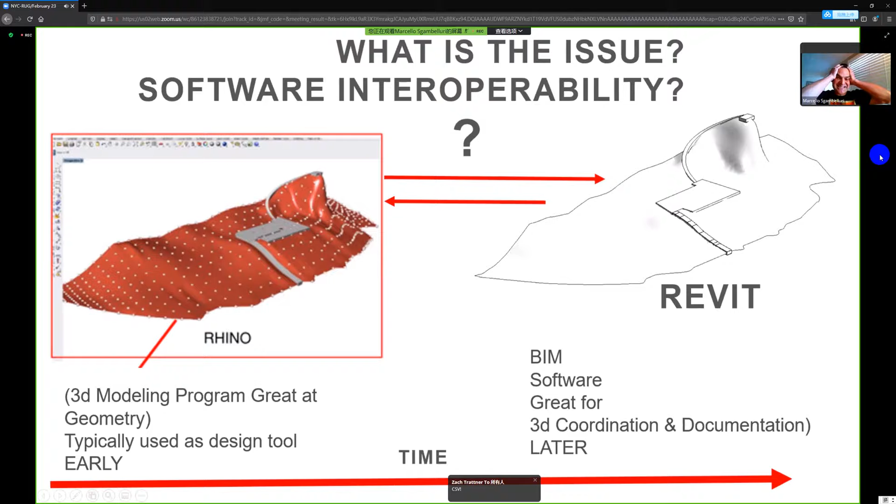Okay Jeremy, very good, migraine, nearly everyone has an issue with it. Okay Bob, very good, Bob's talking for the whole group, awesome. So it's 2021, why is this still a problem, right? I'm just laying the groundwork, we're going somewhere with this, okay everybody?

So what have we had to do in the past? It's sad, it really is, but this is what happens. We have to sometimes remodel from scratch, right? Because we can't just go into Revit and say, add Rhino, right? And everything's perfect, we just don't have that, right? It's also not done in the same software.

Nate, okay good, there are add-ins, I'll get to that, right? As CSV, yeah we'll get to that, those are imports. But does anyone model from scratch? Come on, I know you're out there. No one? No one, okay, maybe so.

I do, I'll admit it. Okay, what else do you need to do? Import, I saw CSV, okay that's one, right? Pass it through another maybe database or import, DWG import, right? The problem with this is it becomes unintelligent. Another one is there's add-ins out there, right, that do this, depending on what software you're using.

Conveyor by Nate Miller, there's also others, right? Mantis Shrimp, things like that. But these are all solutions that we're kind of using in our industry that aren't quite as seamless as we would like it, right? So is everyone on board with me so far? These are kind of the issues, I'm just setting up what the problems are here in our industry.

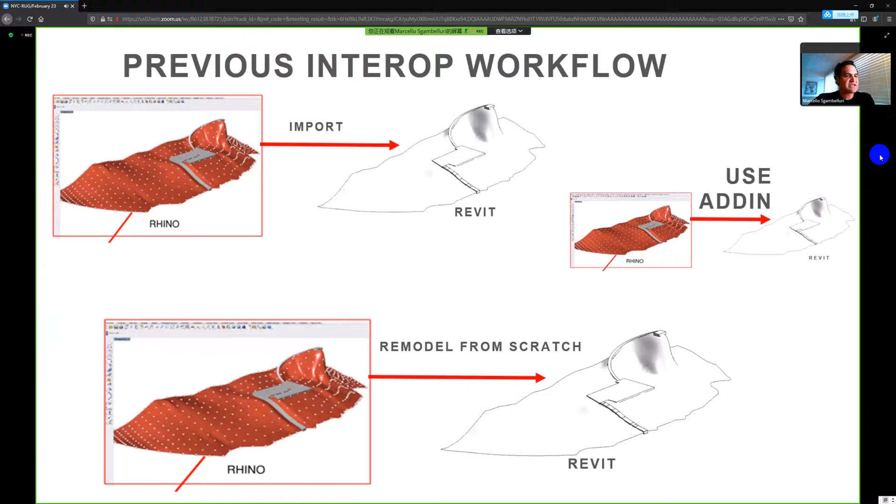Any questions so far? Okay good, we're moving fast, this is awesome. So what do we do? On board, nice Andre. What do we do?

Well, there's a GIF now in our industry. Can anyone guess what it is? Here, this is a hint. Someone guessed it earlier. Andre mentioned it too. Come on now, we got to get, this is virtual, but we get everyone involved. Come on now, anyone guess what this is?

Rhino inside, that's right. This was a rhinoceros that I modeled inside of Revit. It's just, anyway, it's Rhino inside, okay? What does that really mean? What does Rhino inside really mean? There's a lot of talks out there on Rhino inside. I've probably easily done at least 10 of them over the last year on Rhino inside.

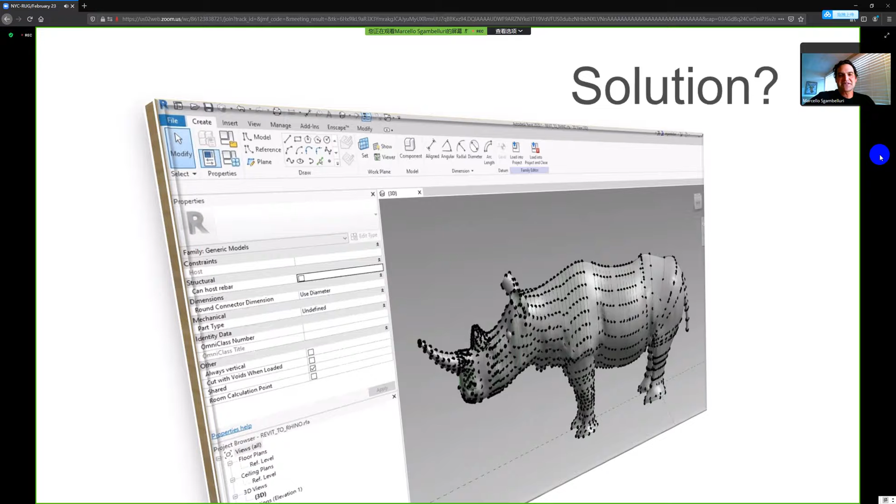We're going to take a slight spin on it, but this is one technology that can help you solve your problems. Why is that? The McNeel folks, the ones who make Rhinoceros, I tend to call Rhino Rhinoceros because when I say Rhino and Revit and keep saying them back and forth, sometimes I start switching them since they're one syllable words with an R. So I'm going to try to call Rhino Rhinoceros just for everyone, so you know.

The McNeel folks said, okay, why don't we do this? Why don't we take the entire Rhino program and all of the things that come with it, including Grasshopper, and we'll just shove it inside of Revit. And what does that mean by shove it inside of it? That means we'll actually make it an add-in, okay? So now that's what's happening.

So we have this new tech called Rhino inside Revit, and it's exactly that. It's Rhinoceros inside Revit, it is now an add-in. It's an elaborate add-in, probably one of the most elaborate add-ins I could think of out there, but it's basically an add-in, okay? And what that allows you to do is start to solve some of these interoperability issues.

Don't worry, I'll keep an eye on the time. Andre, we can go till the hour. I get about 30 more minutes or so. Go, keep going.

Okay, let's look at this, right? Rhino inside Revit, now we have rhinoceros and grasshopper running inside of Revit. So what does that mean? That means now if we have a rhinoceros model, and we'll bring this one up a little bit later, but just about anything could be inside your rhinoceros model.

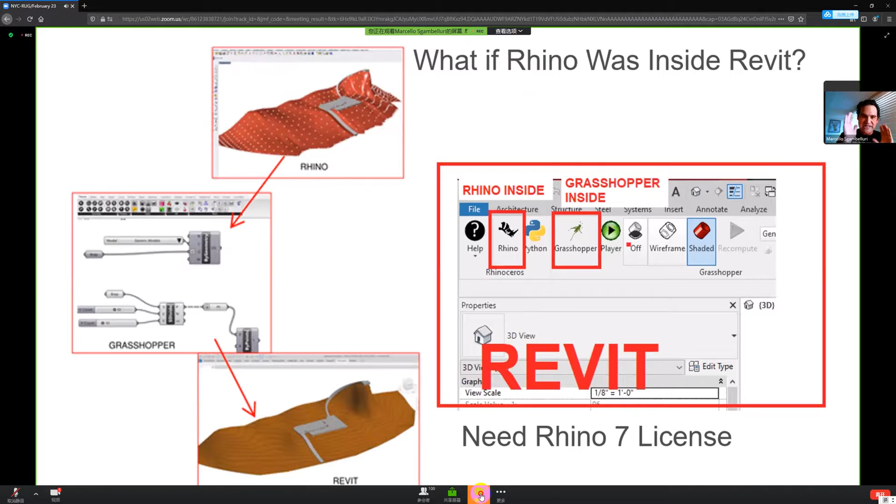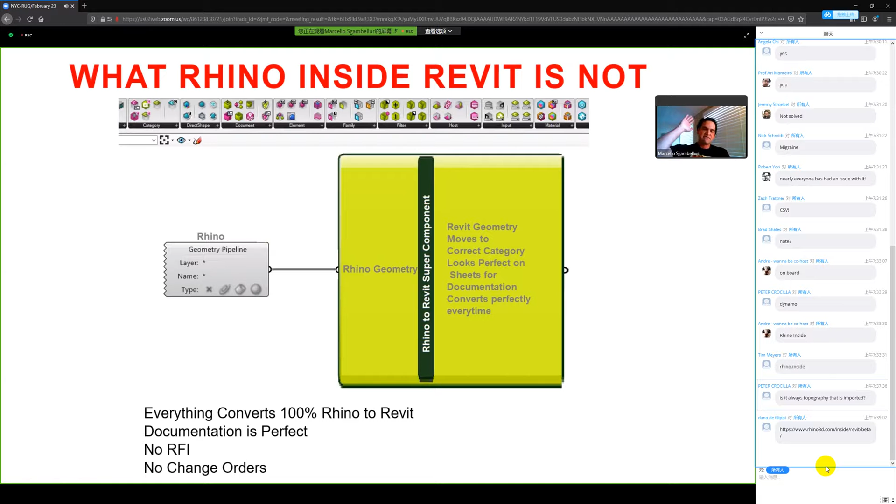This is not true, okay? This is not true. I just want everyone to understand that. It's not an easy button, but you need to make it that way - reference, right? So everyone clear on that?

And that's what the McNeel folks did with Rhino inside Revit - they wanted to give you a framework at which to build off of so that you could mold it and shape it later, but you do need to ask yourself critical questions as you use this tech.

Okay, link to Revit, if the change - yeah okay, the question was, what about the changes? Let me just say this: what happens with this technology, if you're not familiar with it - this kind of talk I was just giving a brief summary, but there's a lot more elaborate explanations of it.

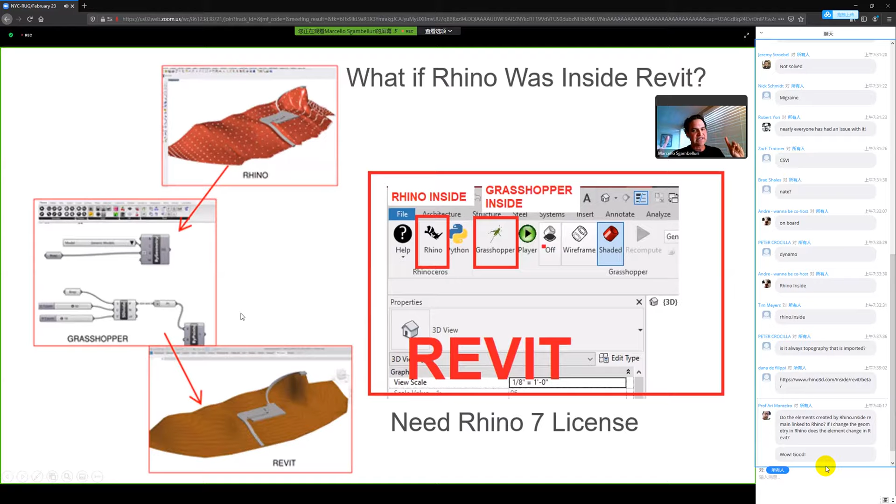All right, so now what? Let me show you a little bit live. I don't have a lot of time for live demos, but I want to show you when you use this technology, you need to be critically thinking, and then we'll get into other things, including Dynamo.

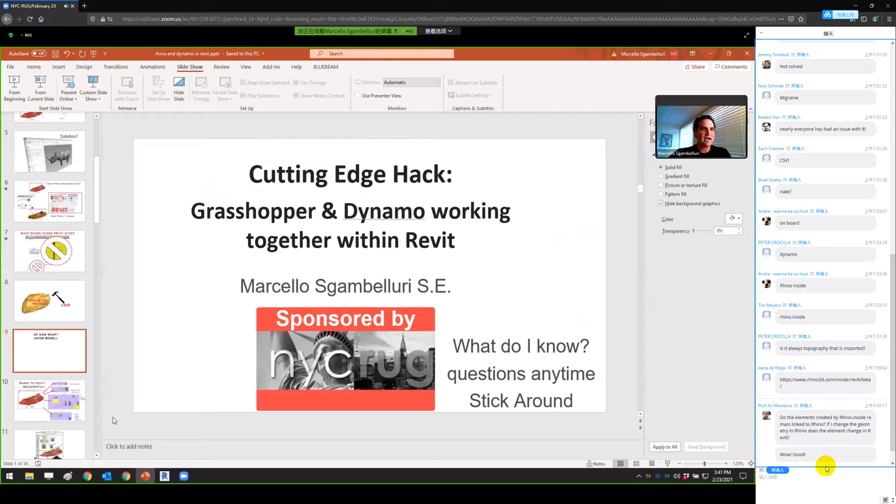Okay, let's look here. This is the rhinoceros model I had open earlier. If you're inside Revit, there's a new tab called Rhinoceros, if you have the Rhino inside Revit plugin. It gives you access to this functionality: opening the Rhinoceros model, and access to Grasshopper.

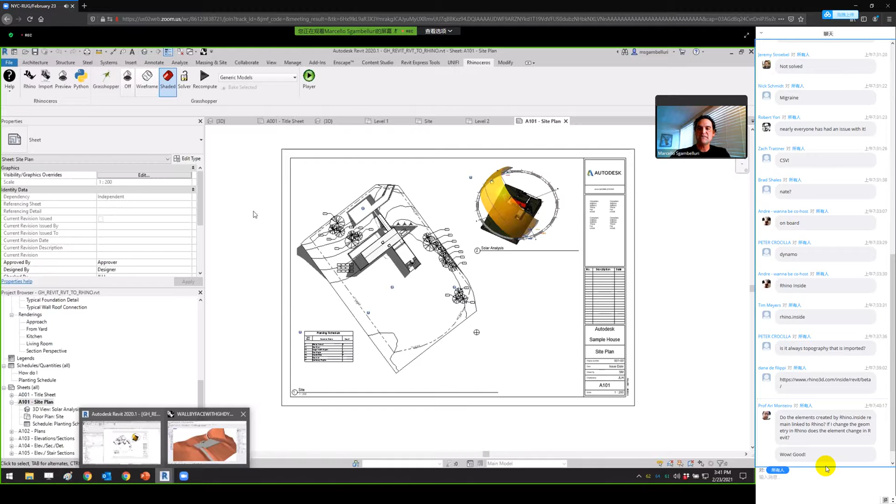I have Rhinoceros open right now. This is called Rhinoceros Inside, meaning it's open as an add-in through Revit. If you look at my icons on the bottom, you don't see a rhinoceros icon, right? That's because it's running inside Revit. If I closed Revit, it would close Rhinoceros Inside too. It's running inside, as an add-in.

Okay, look at this particular model. This is probably very simple, but I'm sure you have more elaborate ones. But let's talk in simple terms. You wouldn't want to just take this whole thing and bring it into Revit, right? You need to make critical decisions as you move forward.

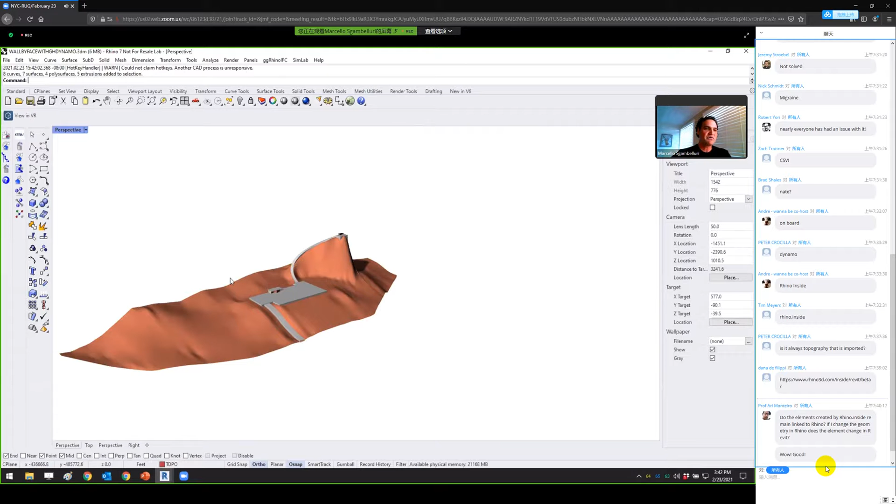This particular surface in Rhinoceros is a BREP, on a particular layer. What is this going to manifest as when I send it to Revit? Is it going to be a topography surface? Probably. Now what about this? When I send this to Revit, what should it be? Why are you asking yourself these questions?

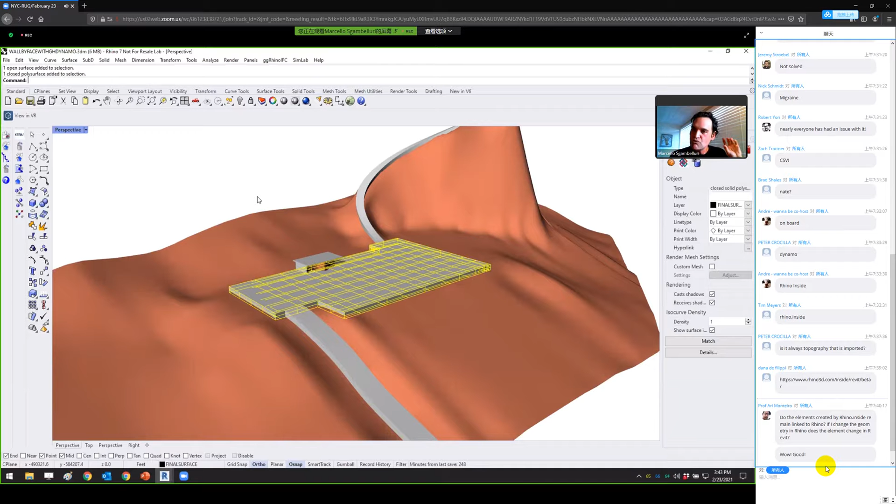Because Revit doesn't know. If you send Rhinoceros elements to Revit, it's going to ask what category you want it to be in, what type you want it to be, because Revit asks these questions since it's a BIM software. It has meaningful information behind each entity. So if you're bringing elements from Rhinoceros into Revit, you need to ask these critical questions. So what would this be? Is this parking?

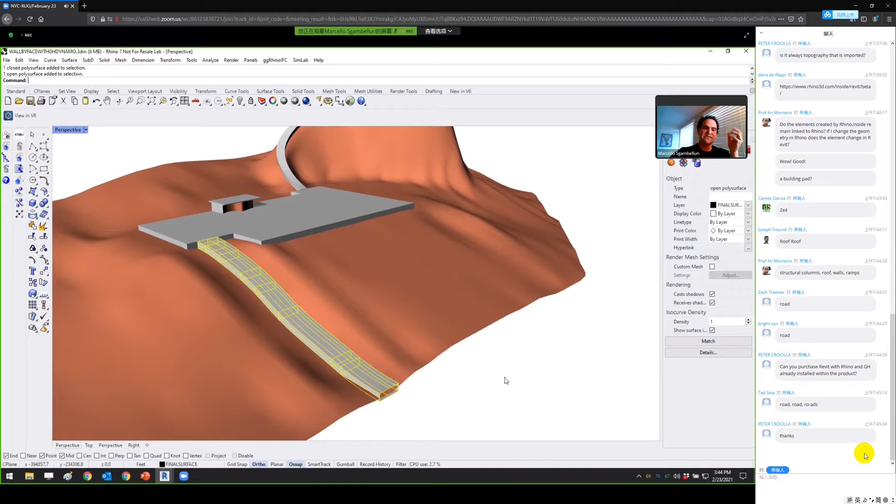I'm going to talk to you really quick about how you bring elements in. So here's our element again, our Rhinoceros model. There are kind of four ways to do it, and I'll go over this quickly so we can get on to other things. Like I said, meaningful information - if you bring something into Revit and you can't dimension to it, can't cut sections through it, then why bring it in? Well, maybe you want to do it for visualization, maybe to a game engine. Okay, that's good, then you probably want to use this first method.

I call it the quick import. You basically take the geometry, it brings it in as what we call a direct shape, and just puts it on a generic category. Next down from that, you can bring in quick geometry but assign a category to it, so maybe for a road. It's just quick geometry, comes in as a direct shape. And a direct shape is basically a generic geometry within Revit - that's kind of what it is.

It's a relatively new thing inside of Revit, but you can assign a category to it. So you could assign the road category.

The next level of bringing something in is you could take an element within Rhinoceros and build it inside a family template that you choose. Then you can load that family template in. So maybe it's a door, and you build it in the door family and bring that particular family in, or maybe a structural beam.

And the final way to bring it in is where you're actually building it as native Revit geometry. So I'm just giving you a summary here, and we'll go over some specific examples, but this is basically how it works.

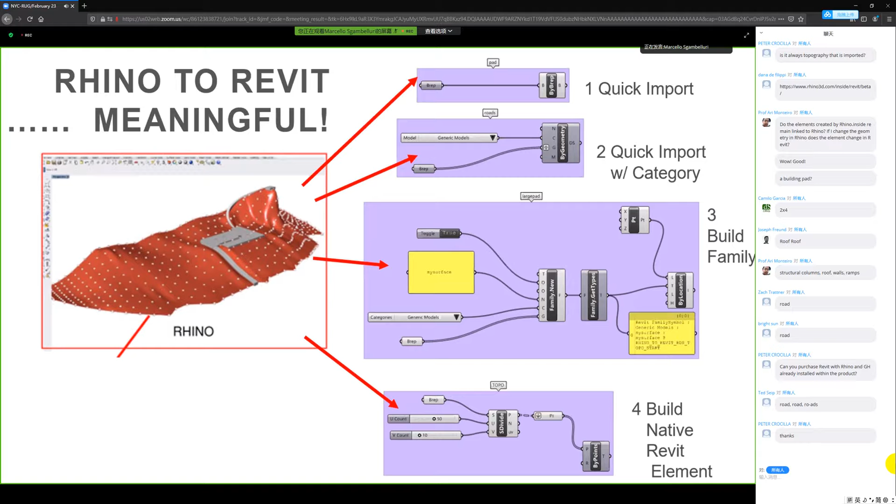Why do you need to understand this? Because you have to ask yourself these critical questions. Any questions so far about this? I know I'm moving a little quick, but I guess I should ask, how's my pace? Are we good? Milo says good. All right, get to it, Marcelo.

Okay, so we already went over this one, right? I like to do these one-page summaries. So this is how to do topography. If you had topography inside of Rhinoceros, how do you bring it into Revit? That's meaningful, and it only takes a few nodes.

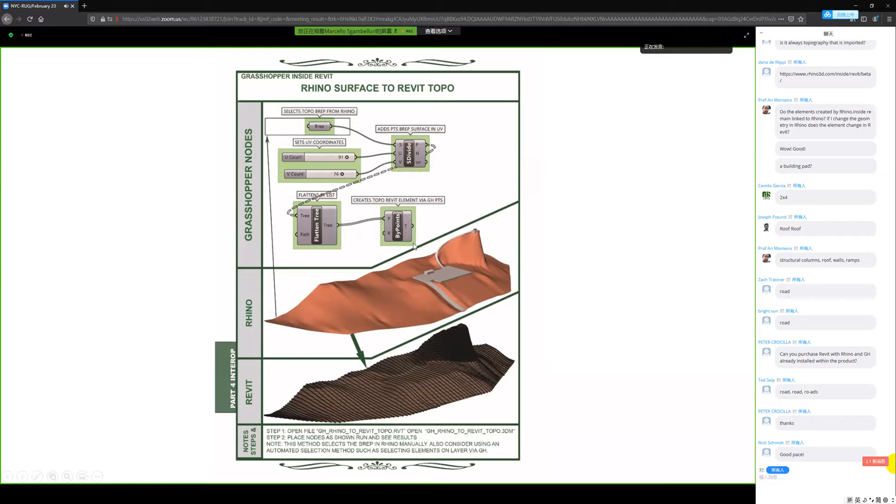Basically, this is Grasshopper, so these are the steps you'd go through. You would open up Revit, then open up your Rhinoceros inside model. You would then place down this node, which is a generic surface selection node out of Grasshopper. This adds points to divide the surface up, and then you recreate the topography in Revit using this node. It creates a topo Revit element via Grasshopper points. So that's how you would do this.

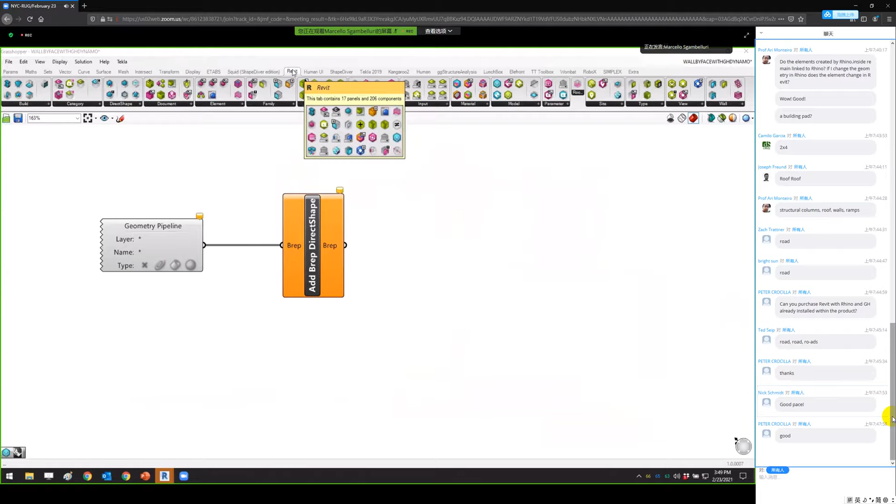These kinds of things live if you were to go back to Revit - these things actually live in Grasshopper under this Revit tab. This is new kid on the block. If you have certain add-ins, it would just show up right here as Revit, and there's over 200 components in there. One of them is create topography.

So it's that simple - I kind of like to call this plug and chug. Maybe you're not doing topography, I don't know, whatever, but let's go through some more examples.

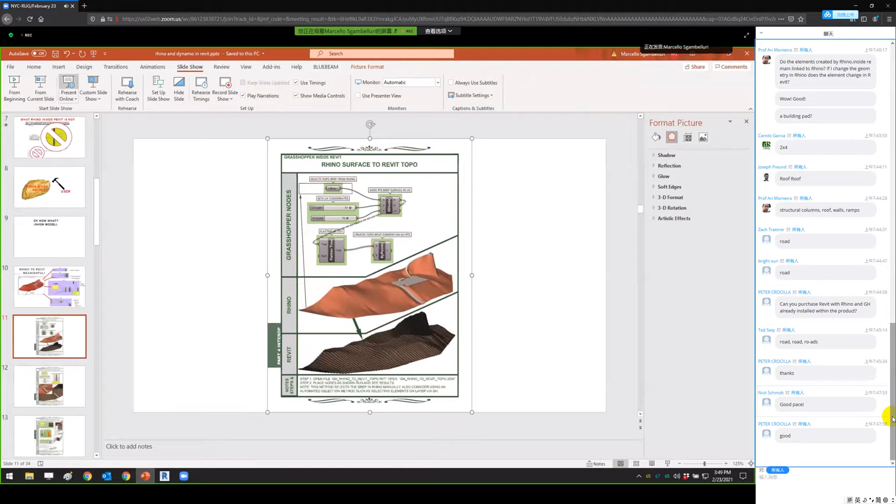So we talked about this, right? What if we had this particular element? Maybe we want to bring that in as a road. You can actually use the road category and bring it in as what we call a direct shape. Now it would be on that category, so you can filter it, etc. You even have the ability to add material to it, if you were going to do cut sections through it, that sort of thing. You could even name it - I called it straight road, but whatever. You get it, right? Does this seem pretty simple to everyone? How long is this? 1, 2, 3, 4, 5 nodes to get a road from Rhinoceros into Revit in a meaningful way.

Yeah? Is this good stuff? Got to get something, come on guys. Where are we at? Yes?

Can you talk about trade-offs of direct shape?

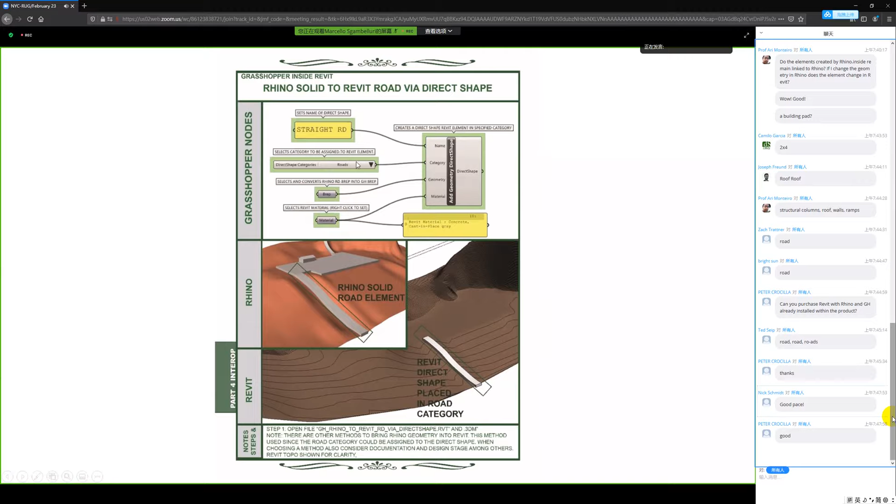I certainly could talk about trade-offs of the direct shape. It's going to be all up to you on what type of workflow you're going to fold in here. Now, I personally tend to use direct shape a lot, and the reason is because I want to see it in Revit and make sure it works, that it's geometrically correct. Sometimes I'll kick it out to like Enscape or another game engine to view it. I'm not necessarily cutting sections through it or tagging it or dimensioning to it, so in that way direct shapes are very good. The reason I use direct shape in this particular road example that I would carry through the project is because there's no road tool in Revit. That's one reason I did that.

Still shocked there's a road category. Yes, you should be very shocked. I was shocked when I saw it.

Wait a minute, in Revit, where's the road tool? I don't see a road tool in Revit. Where would it even be? Under massing and site? Anyone see a road tool in here to build a road? But there's a road category. Okay, very good, good question.

So let's head back. Direct shapes have pros and cons. I use direct shapes for roads because I can just give it the category, since I don't have a quote-unquote build road tool inside of Revit.

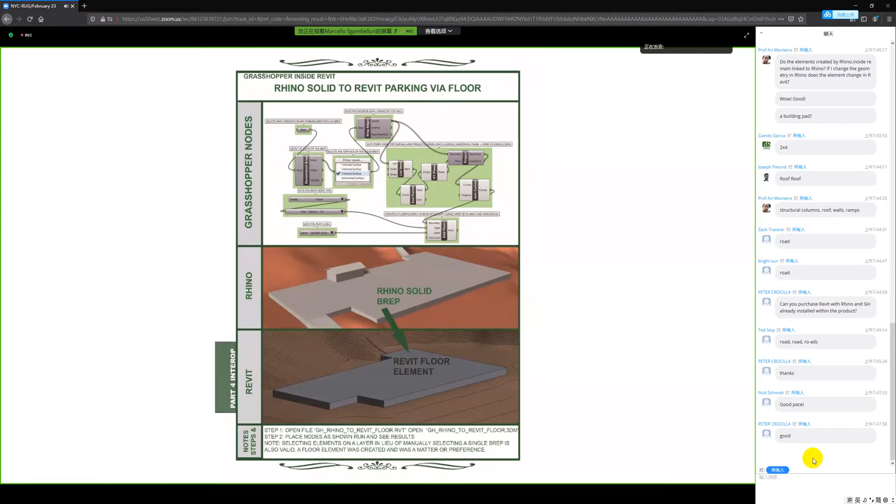I need to go back here. There it is, right? That's why. You want to have discussions in your office? Go for it. Should we use a floor? Maybe, right? There it is for you. Piece of gold, use it. It'll make your lives awesome, I tell you.

Okay, here's another cool one. Let's talk about those columns that were up there. Someone said 2x4, but these are columns, right? In Rhinoceros, we have columns, right?

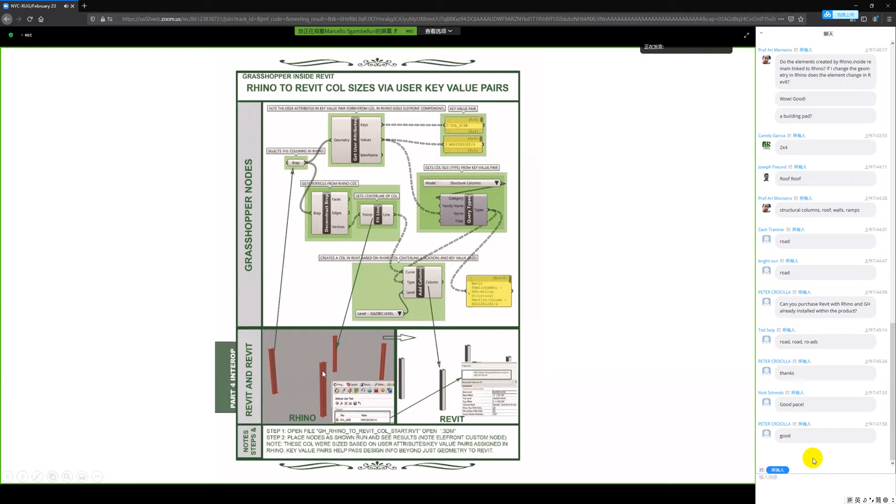I'll show you what's even super cool now. I don't know if anyone can see it, but Rhinoceros actually does have information where you can embed information inside of objects. They're called key value pairs. They're kind of hidden, but they're super neat. If you go to Rhinoceros, every element has the ability to embed information inside of it in the user attributes. User attributes can actually have key value pairs. So you could enter in here like structural column and then give it the size.

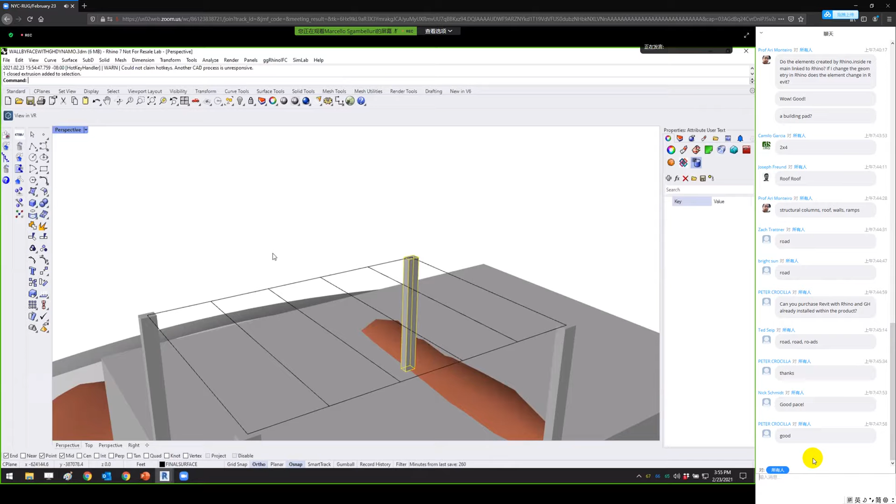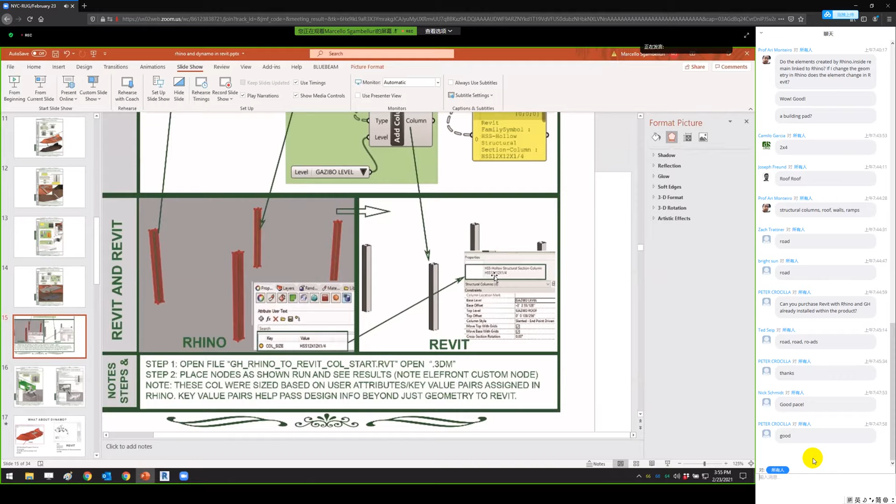And that's what I did in this particular example. Now, Rhino inside Revit can pull that information out of Rhinoceros, and not only will you get the geometry, but you can actually pull over smart information, like I'm showing here. I don't know if there's a way to zoom into this, we'll just hack it. What you can do is embed that information inside of Rhinoceros. Then when Grasshopper reads that information, it pulls the geometry, pulls the center lines, and pulls the key value pair. Then it can tell Revit, hey, build that column, but not only that, use that type and assign it. Boom. So it's another dimension you can give to the interoperability between here.

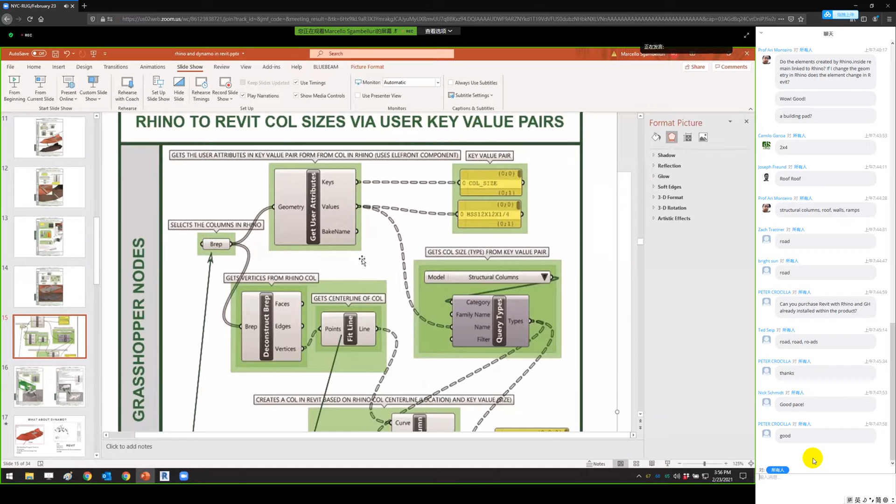So it's something you can think about. They're called key value pairs. There's a good add-in that uses it called Elefront. It allows you to put in key value pairs parametrically through Grasshopper, or you could just enter them in manually, however you want to do it.

Does that mean the value needs to match the type name? That was a very good question. It doesn't have to, but it certainly could. You could just say 12 by 12, and then you could set up filters to be able to do a lookup and then assign it. So that's not necessary.

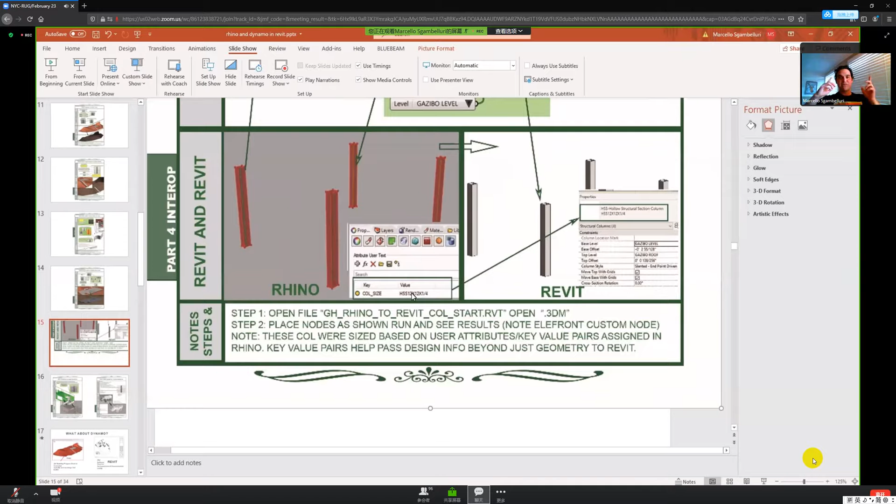How would the Rhino user know to put that in, right? We'll go over that in a little bit. I can tell you one way to do it: virtually, or if you're in the office, the Revit user could stand up, walk over to the Rhinoceros user, and tell them. That's one way to do it. We'll get into other ways to do it.

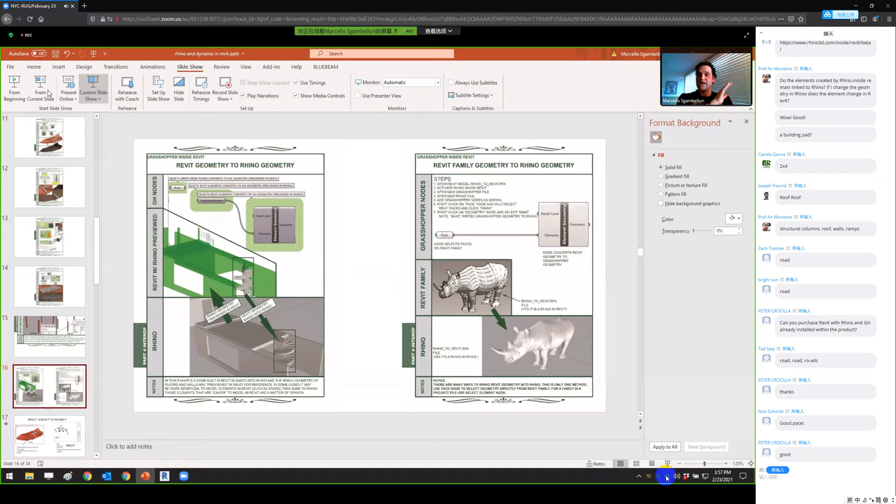Okay, everyone cool with this? So I've been kind of focusing on going one way, but you certainly could go the other. You could go from Revit to Rhinoceros. Here's some very good examples.

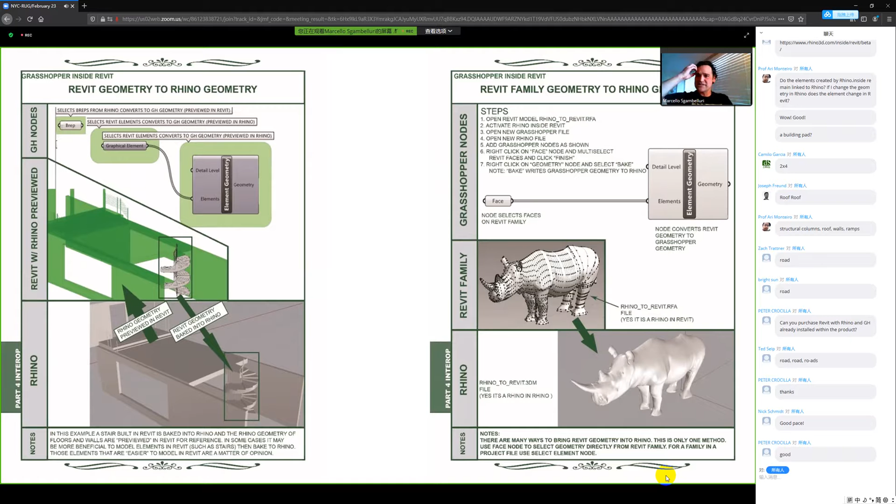One is, I use this all the time, I go from Revit to Rhinoceros a lot. Why? Because a lot of times I'll be building stairs, and I like the way Revit builds stairs better than Rhinoceros builds stairs, just gonna say that, okay? So what I do is I'll build these stairs inside of Revit, then pass the geometry to Rhinoceros. I'll continue building my Rhinoceros geometry around my stairs, and kind of go back and forth.

So in this particular example, this stair is built inside of Revit and then brought into the Rhinoceros environment. And these particular walls and floor were built inside of Rhinoceros. So you can start mixing and matching and have yourself a good time. I've never had any problems with geometry conversion going from Revit to Rhinoceros. Here's a case in point: this right here is the Rhinoceros inside of Revit.

And then this is the rhinoceros inside of rhinoceros. Okay, so there's the conversion right there. So it seems to work pretty well.

Are there any questions about that before we move on? Are we doing on time? Oh, we're doing awesome on time. Okay, so any questions about that? That's kind of the Rhino inside Revit technology, right? But the name of this class is Grasshopper and Dynamo. So what about Dynamo, right?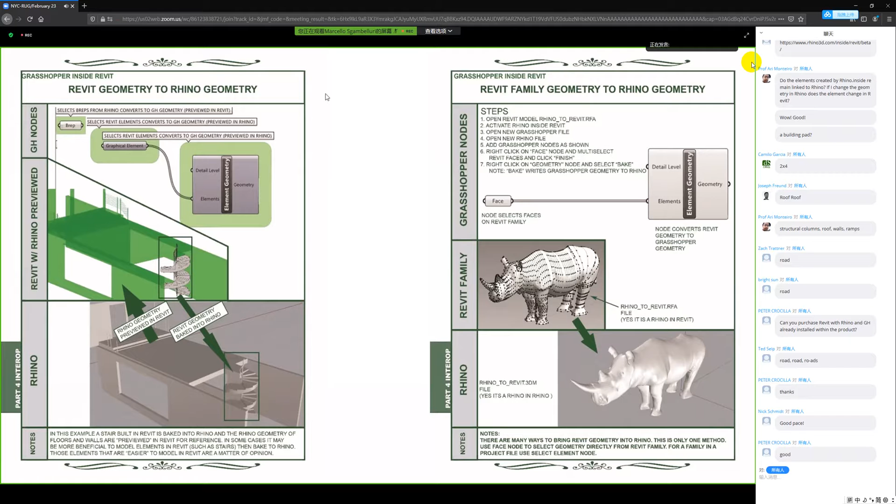What about Dynamo? Okay, this is kind of the new thing I've been talking about. Everything I've showed you, you really could Google online and find the ins and outs of Rhino inside Revit. What I want to do is get everyone thinking critically about what other tools you have, and one is Dynamo. Let's talk again about the advantages of Rhinoceros and Revit.

Rhinoceros is an excellent 3D modeling program. Revit, in my opinion, is very good at documenting and 3D coordination. So keep that in mind, right? Well, what does that mean?

Well, Dynamo has been around a long time, interacting with Revit, right? So what Rhinoceros and Grasshopper are great at, and Rhino inside, is really good at 3D geometry. But there's a lot of components that don't exist for documentation and so on.

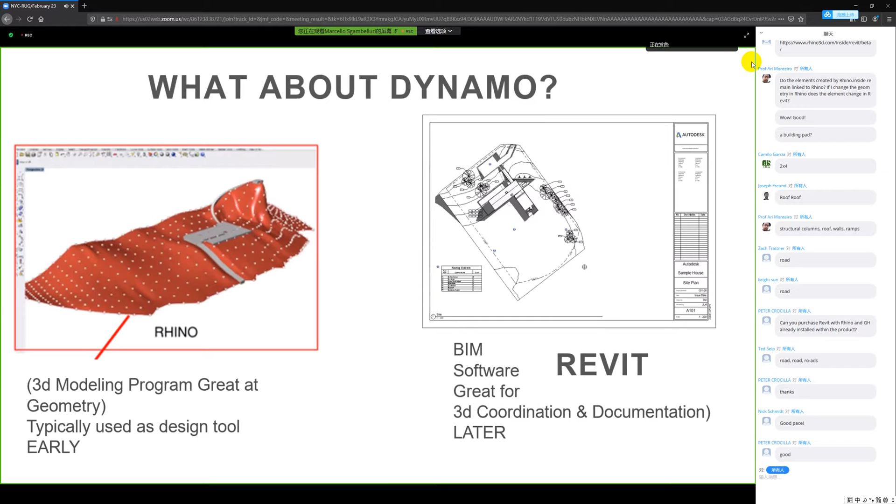You remember that tab I showed you? I'll show you a little later. But Dynamo is very good at 2D elements, dimensions, text, right? So think about how these two can work together, think about their strengths, right?

So if we can think about that, also a lot of companies—maybe we can give like a smiley face or a thumbs up—how many of you use Dynamo in your office right now to interact with Revit in some way? Anyone? Yeah, Peter. Okay, so what I'm saying—yeah, I wish. Okay, good, at least a little bit, right?

And you've probably already created workflows for it, right? So I'm not saying toss it all out the window. I'm not saying that. Think about how they could be worked together. I will help guide you to think about how you can do that.

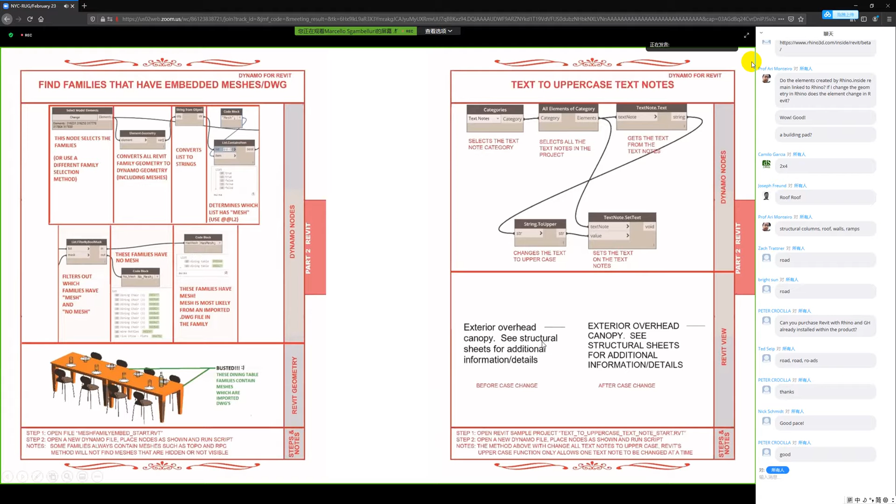One of them would be—any guesses? I just went over them. Can anyone tell me what one of these 206 are based on what I showed you? Tell me one. I showed you a few already, right? Topography, yes, add topography. Give me one more because I know you were listening. Give me one more of the 206. Floors, yes, add floor, Nick.

Okay, very good. So that's 204 to go. All right, who's next? No, I'm just kidding, I'm not gonna do all 200. The point is there's 206, which is not a whole lot. They all focus around geometry. Take my word for it, for the most part.

Dynamo, there are thousands and thousands of components, right? Thousands, if you include all the packages out there. I mean, I have a package at Dynamo right now called Simplex. That has 1,600 nodes alone, okay? So there's a lot, right?

So let's think about how we could have them complement each other. If you have 206 components here, there's probably something that you need that you don't have as you're starting to look at this technology. So one option, and I didn't mention this earlier, is you can create your own.

Did I get a smiley face if someone followed me on that? There is no out-of-the-box Rhino Inside Revit component right now that can change the text on text notes inside of Revit. Anyone follow me on what I just said there? There's no out-of-the-box option. Yeah, okay, good.

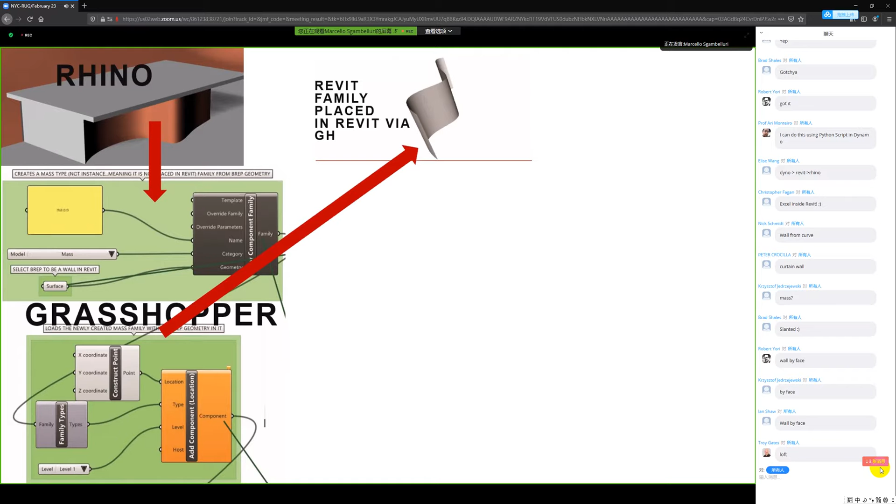Is the mass within the mass family template enabled within Revit via SAT geometry? Ooh, that's a good in-depth question. Ian, let's chat later on that one. That one requires a bit more explanation. Is everyone clear? Ian, that's a good question. Maybe we'll chat later, or you can email me. We'll talk about that later. But that's a good question. Like, how does it manifest itself inside the family? The point is it's in the family, and you do have a lot of freedom when it's inside a family template, and it gives you a lot of freedom.

I tend to use this method, by the way, everybody. I tend to use this new component family to bring geometry over when the components are small inside, and when the geometry is small, it's inside of rhinoceros, like a bench, maybe a Corinthian column, something like that. I'll tend to put that inside of a family template and then stick it into Revit typically.

Okay, so then that's it. Okay, finally, here we go. How about this? Not only can we talk about the software that work together, we need to talk about the users working together. Okay, now I need a little survey here.

How many people have separate users? It could be the same person. How many typically have separate users that will do the rhinoceros? Let's just say typical, and then we'll typically do the Revit. You have kind of dedicated teams. This is the design team. This is the documentation production team. Anybody? No one. Come on. Anybody? Maybe. Separate, okay, for sure. Yes, yes, yes, 80%. You know, there's hybrids, of course, right?

Separate, solve, wall by curve, good, another wall by curve. I need to simplify a spline, wall by curve questions. Ooh, I love it. Okay, professor, well, email me, we'll talk later about that. Often separate users. Okay, is everyone on board with this?

You will not be able to make this tech work unless you get the users to work together. And how do you get them to work together? The same thing. You look at their strengths, you look at their weaknesses. Everyone see that last one? I know I'm running out of time, so I gotta speed through this. It's attitude, right? So you gotta make sure they're proactively working together.

If I had more time, I'd go through this. I had this little comic strip thing, but anyway, everyone get the idea. This is a common thing in our industry. Even in structural engineering, you tend to have structural engineers, and they have their own analytical models and software. And then you have the BIM production team who tends not to be traditionally engineers. But anyway, so this is kind of a common theme where not only the software work together, you need the individuals to work together. So just think about that as you move forward, right?

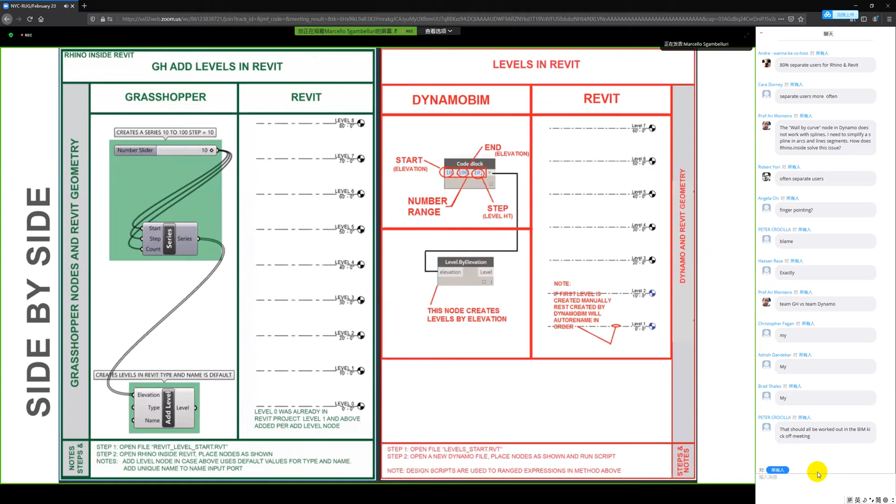Finally, you've seen these things side by side - Rhino inside Revit typically does geometry and can build elements, but there is some overlap. Dynamo's on the right, Grasshopper and Rhino inside Revit is on the left. You can build levels, and you can get and set parameters with both of them.

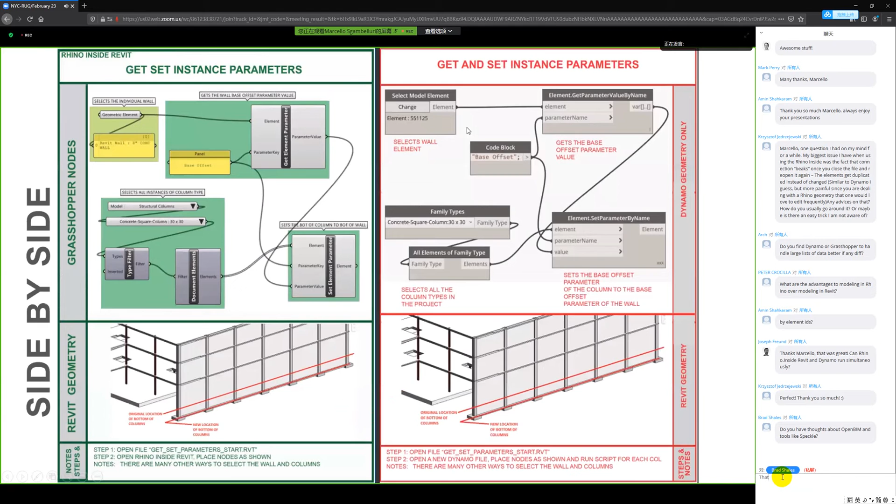Can you run Rhino inside Revit and Dynamo simultaneously? That's a good question. I'll tell you how it works: you could have a Revit model open, have Dynamo attached to that Revit model, and have Rhino inside Revit attached to that same Revit model. I kind of alluded to that in this graphic - I tried to summarize it here really quick, but this is kind of it. You can have them open and working at the same time.

A question was about passing element IDs. Sure, if you want to pass element IDs, you could do that. Absolutely.

Questions on Speckle - this is the conversation here. I'm focusing on Rhino inside Revit and Dynamo, that's where this whole talk is. So Speckle is a bit off topic because we are talking about interoperability between these two softwares. This is the workflow I would recommend you consider thinking about, the one on the screen. If you want to pass information to other places and back using Speckle or some other type of software, I don't discourage that at all. I'm just saying if you want to think about this workflow, this is how you can be successful at it.

MicroStation, is that a question? I see MicroStation in all caps. Oh wait, no, I don't know where to go with that one, Peter. MicroStation obsolete - you want to have more theoretical discussions. You know what we need to do, Bob and Andre, is bring everybody back with all the academia and have an academic discussion about some of these topics, because I think that's where they flow. If you learn through this talk, it's like I've got a problem, I need to solve it now. So that's kind of where the talk is here.